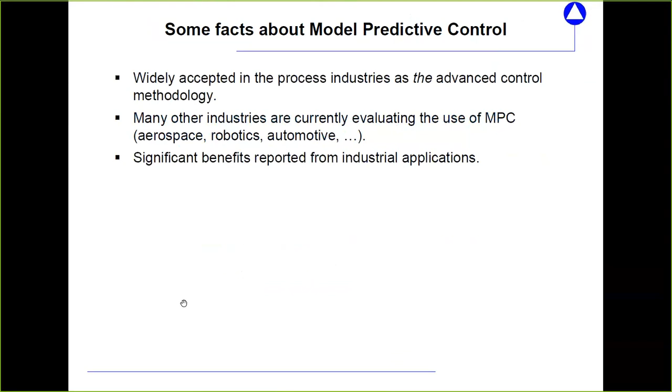Let me give you one example I've taken from the literature. It's an ammonia plant, ammonia production. These plants are really huge, and we're talking about a lot of money. This is an ammonia plant in China. There's a paper I'm citing by Poe and Musif, and in this paper they report about the performance of an MPC controller.

Here you see the time axis running along, and two control variables showing performance in the first couple of minutes—probably these are even hours, 15-minute snapshots. Here a traditional controller is applied, most likely a PI controller, but I do not know. As you can see, the performance shows fluctuations in the system. At this time point, the controller switched to an MPC controller, and from then on those fluctuations are much less. So we would say the MPC controller is really much better, and indeed it is. But with this example, I want to show you a little bit of things you can do with MPC that go in the direction of future directions.

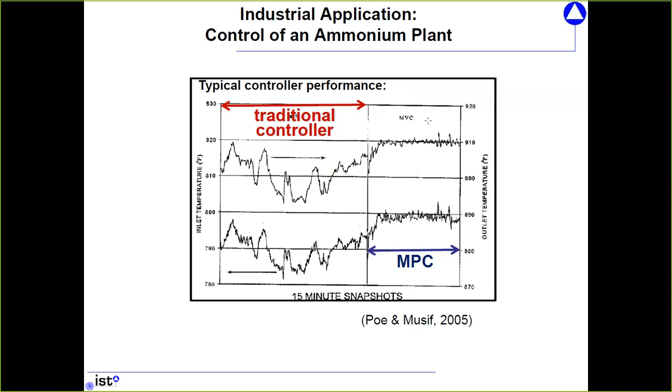Of course, less fluctuations due to disturbances and measurement noise is a good thing. But in this plant, you want to produce ammonium, which means you want those temperature curves as high as possible, but not beyond a certain bound, because beyond that bound the plant goes unstable, explodes, whatever—I'm not an expert in that, but you don't want to go over it. Now, with those fluctuations, to stay away from this critical bound, you have to choose a set point that is fairly low, because your disturbances kick you up and down. If you have less fluctuations, you can move your set point higher because you're still sure you're not hitting this bound.

In this paper, they report a reduced energy consumption by 1.8% and increased productivity by 0.7%. That doesn't sound like much, but I'm sure this is millions of yen and probably also millions of dollars and euros every year. The biggest part of that is not due to better disturbance rejection, but to being able to move the set point to a place where it's better suited. Keep that in mind, because I will come back to it later.

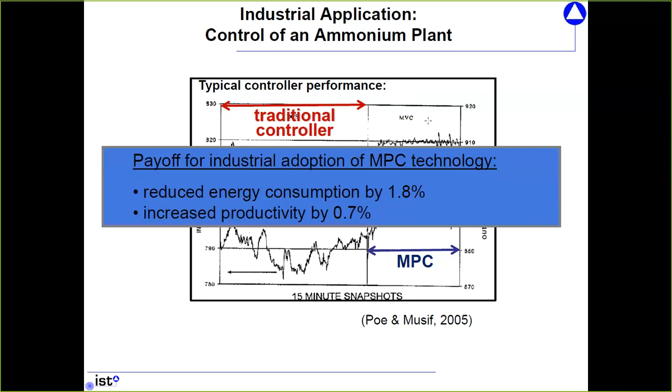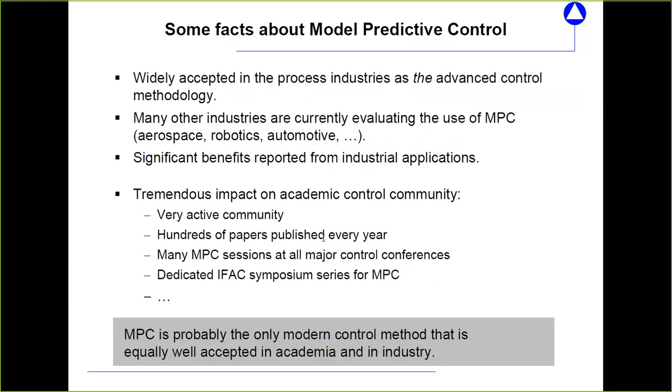So in industry, MPC is very much accepted, but also in academia there is lots of activity going on—it's a very active community. There are hundreds of papers published every year, I would say thousands even, too large a number to read. At all conferences there are many sessions. There's even a dedicated IFAC symposium for nonlinear model predictive control, taking place later this year and every 3 years. It's maybe even fair to say MPC is one of the very few control methodologies really accepted both by academia and by industry—a very interesting methodology.

Now, what is it? I hope I got your attention, and you're saying, oh yeah, we want to know what MPC is. So what does MPC solve? MPC solves an optimization, an optimal control problem, in the sense that we have a plant described here by an ODE, but that can be absolutely generalized to differential algebraic systems, linear systems, even PDEs, to systems with output.

So you see this more as we have a model of a system, and we want to find for that model a stabilizing controller. The first goal is we want to stabilize our system, but we also want to achieve a certain performance.

This performance is given by an objective functional that we want to minimize: an integral objective functional from the current time to infinity over a so-called stage cost that we call f, that depends on our states and on the inputs of the system.

Note, for all those who know MPC, I've written infinity here. So we are interested, when we have an ammonia plant or whatever you want, from the day we switch the controller on to whenever this plant is dismantled, to have an optimized performance. Not over some finite horizon, but really the infinite horizon is what we are interested in.

And now what are we also interested in? We have to satisfy constraints on our inputs, so that the inputs cannot be arbitrary, and we can also have constraints on the states or a mixture of both, such that, like for example in this ammonia plant, we don't want to go above a certain temperature or something like that.

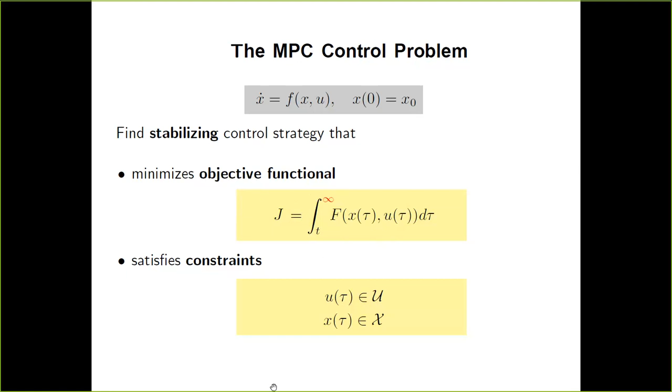This can be written down in the form of this description here. So what we are talking about is really an extremely general problem that we want to solve. A very general class of nonlinear systems that we can deal with, a very general nonlinear objective functional that we can deal with, plus we can have very general, almost arbitrary nonlinear constraints. So this is a very broad problem, but it's an optimal control problem.

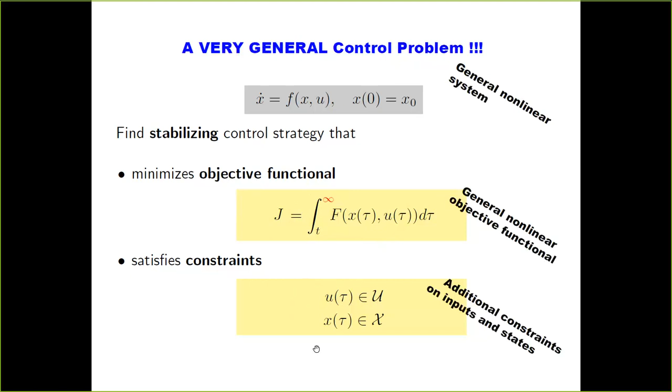Now, how can we solve this optimal control problem? Well, there are essentially two possibilities for that, and these will both not be MPC that I will show you. I want to show you a little later what then MPC does about that.

So one possibility is really that we try to find an optimal feedback controller, a u equals k of x, in the form, in the case of state feedback. So we want to have a map really that maps every point in our state space to an input function, and such that the closed loop trajectories are really satisfying optimality conditions. This is the classical optimal control problem, and this is a wonderful theory that leads to many different solutions.

Hamilton-Jacobi, Pontryagin's maximum principle, a lot of important things that are really associated with that. And it's a wonderful methodology, beautiful. You have a feedback, of course, because we design a feedback. It's suited for uncertainties, it's good for disturbances, it's good for unstable systems, but it has one significant drawback.

If you have some system that is beyond the most trivial cases, then you will not be able to compute such a feedback. It's very difficult, especially in the constrained case. So wonderful theory, by the way, a very old theory. We are talking about almost 70 years now for that theory, but you will not be able to find it.

Now, what's the other approach? Well, if we are operating a system, then we don't really have to compute offline such a map that holds for all our states in the region where we are interested in. We know where we are.

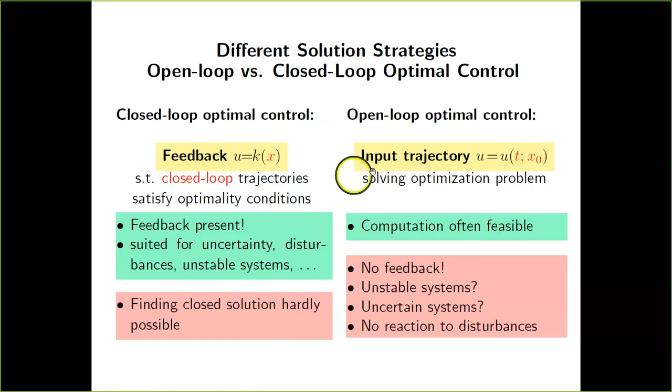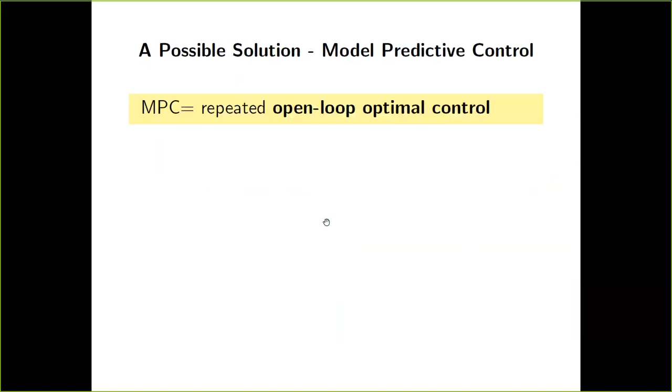And this is done in that you are not solving this open loop optimal control problem only once. You take a measurement, compute a trajectory, and then you just implement it and go away, but you do that in a repeated fashion. So you repeatedly online solve this open loop optimal control problem.

So you're solving this minimization problem over an infinite horizon. We are computing a U for the total future, for everything in the future, but then we are not implementing the whole U trajectory, but only a piece of this input trajectory, from time t to t plus delta, and then we are re-evaluating.

Then we are looking what the system does. There is a disturbance, there was model-plant mismatch, some measurement noise. We are somewhere else than we expected, and we are resolving that problem again at that time point. So we are repeatedly solving this same problem and are adjusting to where we are, this way introducing a feedback into our structure. Now, here I look at an infinite horizon problem.

An infinite horizon is pretty long. So even if you have a strong computer, a big computer, going to infinity is very long. That's why in MPC we are choosing a finite prediction horizon. And that's the only reason why we are choosing a finite horizon, because this gives us a much simpler way of how to compute things. Potentially we want to have a very short horizon in which we look at our problem, in order to have really a small problem.

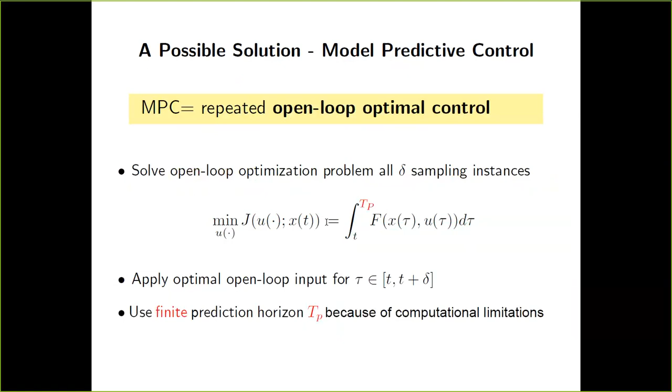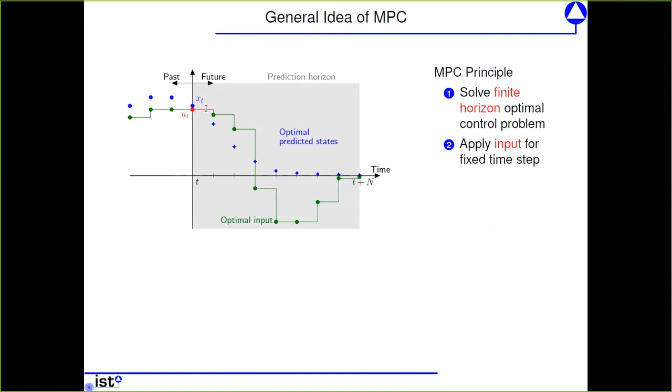Then over our horizon, so over a certain length into the future, here called n - in the former slide I called it t in the continuous time - we are computing an optimal input trajectory, but then we are not implementing the whole green trajectory up to the very end, but we are only implementing, say, the first step of our system. And then when the real time has progressed by this one step, we are re-evaluating our system.

We shift the horizon. That's why it's called the receding horizon, moving horizon control method. We shift the horizon, we keep it the same length. And now we are redoing our computations, again, over the whole horizon, implementing only the first piece, and so on.

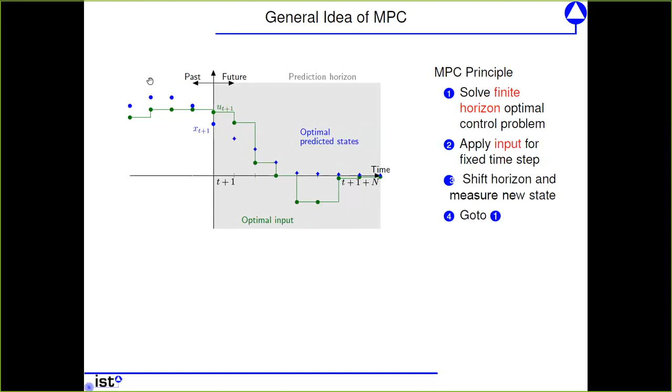So this is really like in the case of playing chess. You have a certain situation, that's our state on the chessboard, and then you are looking ahead, you're planning ahead in the future how you want to play. If I look at the phases here, I would say 20, 30 steps into the future.

You are calculating what you think is your trajectory, but you're only revealing the first step - in my case, maybe 2 or 3, right? So you're only revealing the very first step. Then you do that step, you apply that input, and then you look at what the disturbance is doing. That's the one on the other side of the table in that case.

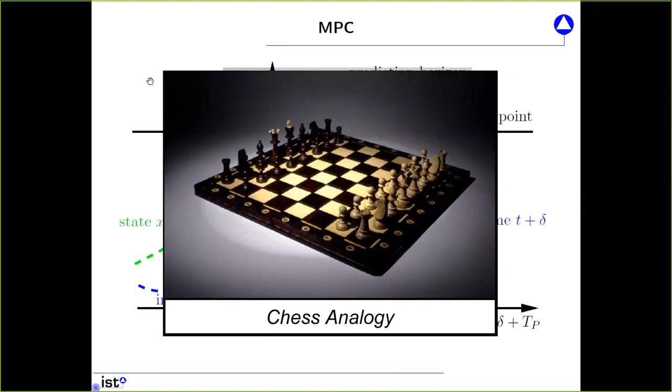And this person makes a move, a disturbance, and then you are re-evaluating again. You're not just following your old trajectory, but you're saying again, my 30 steps into the future, I'm doing that again, and have a new strategy. I apply again the first one, and so on. So MPC is really reacting to the disturbance, incorporating a feedback into an open loop trajectory generation process.

So what does the problem look like that we have to solve? The problem we have to solve at every point in time, in discrete time, is the following: we have to minimize over our U our cost functional with the stage cost small l over the horizon n, subject to the input and the states being related through our system dynamics.

The starting point is the measurement, and what we have to do is satisfy constraints, so x and u have to belong to a certain set. This notation with the bar is typical in MPC, indicating evaluation at time point x of t. The real time is t, and from then on, in a fictitious time, you're computing what happens in the future. These are the u's over this horizon, evaluated at this real time t.

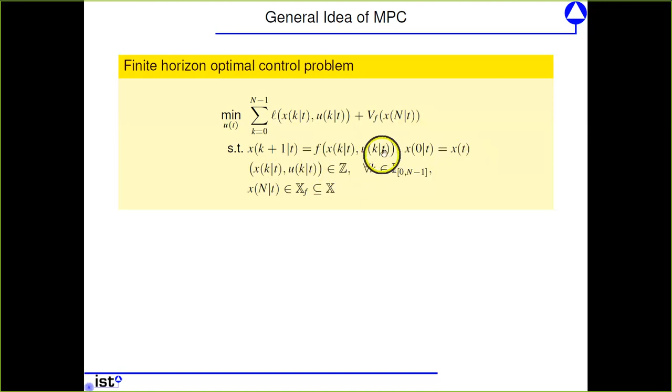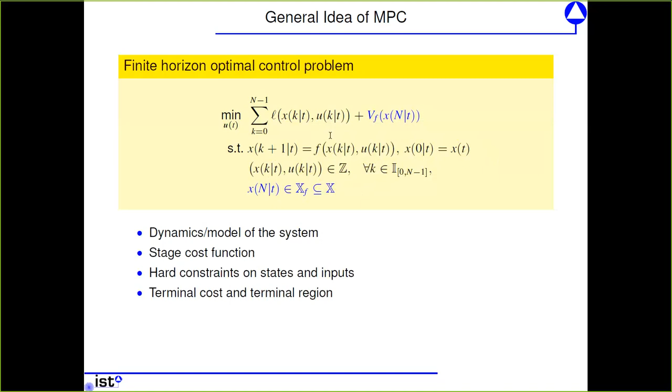What you also see in this figure are two additional terms. One is a terminal penalty term, and one is a terminal constraint at the bottom. Those will play a role later on. They are not chosen arbitrarily, as if you wanted a special weight on your last step, but this will be part of our controller computation, computed offline in order to achieve certain tasks.

This idea is really an old MPC idea, and it's absolutely unclear where it came up. The first citation I know of, which I admit I couldn't read because it's in Russian, is by Propoy from the 60s. Propoy is still alive, and we met him a couple of years back at a conference and asked, 'you were the one who invented MPC?' He said, 'no, this is really not an invention. Everybody knew that at the time, and it was kind of obvious.'

So no one knows who invented MPC, but there are early textbooks, like Lee and Marcus' book from '67, where this methodology is described. You can read through that yourself. But that book also says it's a nice idea, but in reality you can't do it because you'll never have a fast enough computer to do those computations. Well, so much for developments in computer science—now we have the computers.

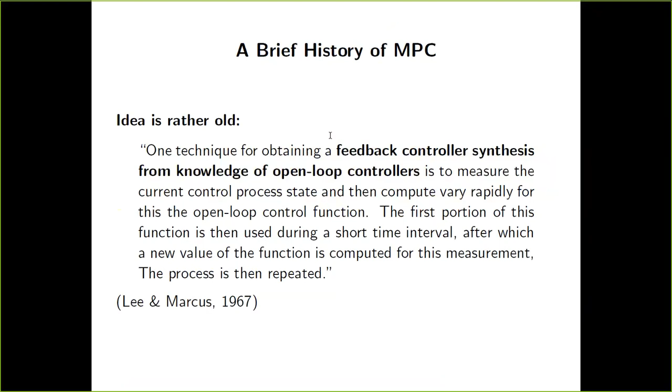This is very important, because the first people who really pushed this technology forward were in industry, essentially two groups: Charlie Cutler and his group at Shell Oil, who developed software called DMC, and Jacques Richalet in France with Adersa, who had a product called IDCOM. In the early 70s, they applied that to industrial methods. They didn't publish anything about it because they made a lot of money with it, and there was even an attempt to get a patent on the MPC methodology. But this patent could not be granted because of the book by Lee and Marcus, since it was already known beforehand.

The first publications are from '76, '79, as far as I know—I don't want to bet on that, maybe there were earlier ones—but it's clear that academic research came a little later. This was something pushed forward in industry first: yes, we can do it for linear systems, very special setups, using quadratic programs, and it could be done in reality. Only later did academic people at universities ask, okay, is this stabilizing? What can we do with that? So it really came later.

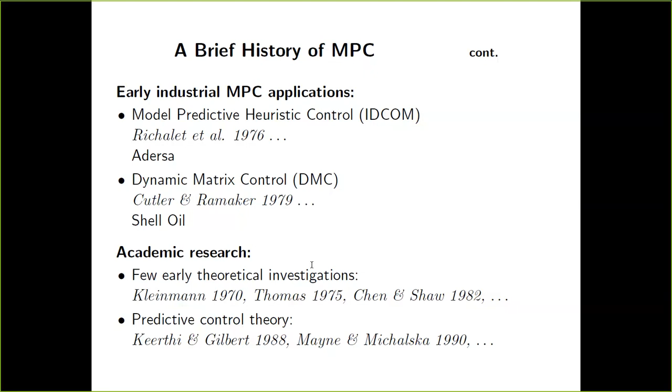I would say the first people who really understood the methodology, at least the nonlinear part, were Keerthi and Gilbert for discrete time, and Mayne and Michalska for continuous time. These were the first publications where the core of the system theoretic problem was really understood—how can you do systems theory for this kind of thinking? I will show you a little bit what the problem is and how you can deal with that.

Essentially, there are two issues in predictive control that you have to deal with. One is the computational issue: at every point in time you have to solve this optimization problem, which is an effort, not trivial, and you can do it in a very stupid way or a highly sophisticated way. There's a whole research community on that, with very sophisticated algorithms and approaches to solve that problem—I'm not going to talk about that at all, I'm also the wrong person to talk about it. What I'd like to discuss, at least a little, is the system theoretic issues.

So what does this method do if we apply this MPC scheme? Are we stabilizing? Is this giving us good performance? How do we deal with rejection of disturbances? How do we have robustness, and so on? This is a systems theoretic problem, and I'm going to discuss it now to give you a flavor of what's going on.

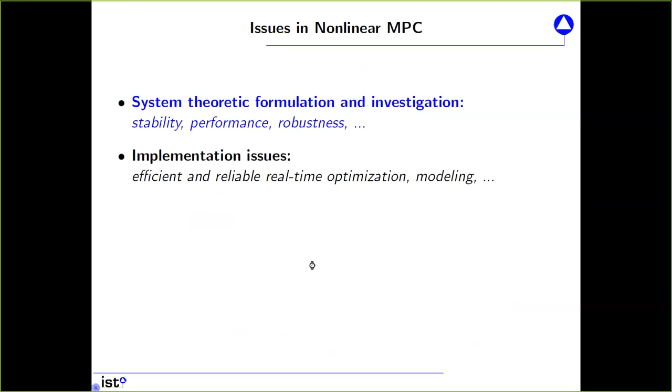The first main question we have to think about is: if we just plain vanilla apply this methodology, take MPC, slap it on a system, take a plant model that is as good as we can, and apply it, is the system stabilizing? The answer is no guarantee. It's not generically stabilizing. Even if you know the system correctly, even if you have no disturbances, no measurement noise, this is not a stabilizing methodology, so you cannot be sure.

People immediately say, before you told us in the 70s they applied it and didn't have a clue how to analyze stability, and obviously it worked, it really worked. So what's the problem? Here's the proof. Here is a first example. I will give you two examples.

One example taken from the literature, Primbs. This is a second order system, and it's immediately clear that it's a cooked system. We acknowledge it's a second order system having one input and state, with a classical quadratic cost functional. Now we are looking at the stability properties for different horizon lengths of the system: 0.3, 0.4, 1.0, and so on.

Down on the left side here you see a state space picture. We want to stabilize to the origin. Here is one exemplary initial condition, and these different curves show the behavior of the real closed loop, not the optimization, at a specific time, to show whether we have stability. If the prediction horizon is 0.2, a short prediction horizon, we go unstable. If you increase it to 0.3, you get stable behavior. Increase it further and you get unstable behavior again. Increase it more, still unstable. Go even further, and you get stable at one point again.

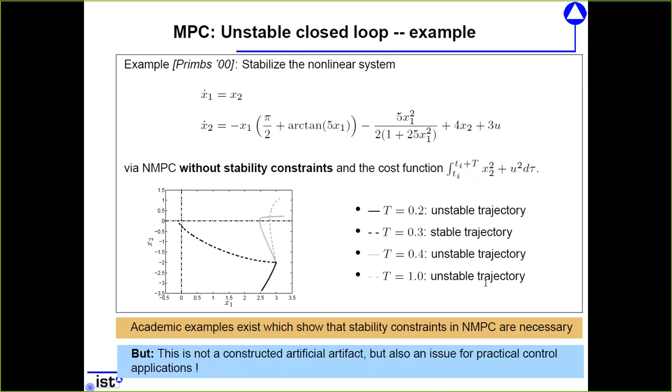Now, this was a cooked example, we agreed. I didn't cook it, other people cooked it, but it was cooked. Can that really happen in reality? Our immediate reaction is reality is not cooked, it's more engineered or more natural, so it won't happen there. But yes, it also does.

Now I show you a second example, and here the audience, many students already know this. This is our 4-tank system that we use in our control courses. I would say the control of the 4-tank system is probably the most boring of the lab experiments we do in our teaching. You have to wait a long time before you see something, and then you don't see much. It's a really slow, boring, and pretty much stable system. To do something bad to that system is a really big problem.

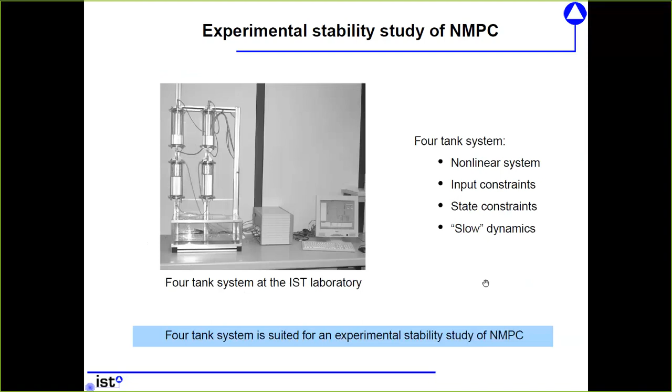Now let's look at this system and do a plain vanilla MPC controller. Again, nothing cooked in this case, just using a cost function that makes sense, a prediction horizon that makes sense, and let's apply the resulting controller to this boring system. Here you see the results: this is the solid line up to 150 seconds roughly, the experiment. The gray line is the simulation, so you can see it better. You see the heights in the 4 tanks for that system, and it's a standard setup.

We're using a prediction horizon of 1 minute, which is pretty reasonable for this 4-tank system—not a short prediction horizon, but a reasonable one. And what you can see if you apply plain vanilla MPC is that after 150 seconds, the 4th tank gets to 28 centimeters, which is the height of the tanks.

If you go beyond that, then you have a mess in the lab. That's why this experiment is stopped at that point in time, because then the tank would overflow. The simulation you can carry on, so it's truly an unstable behavior of that system.

So standard plain vanilla MPC without any tricks, with a horizon length that makes a lot of sense, is not stabilizing this slow, boring 4th order system that we are having here. And of course, that is a little bit shocking, right?

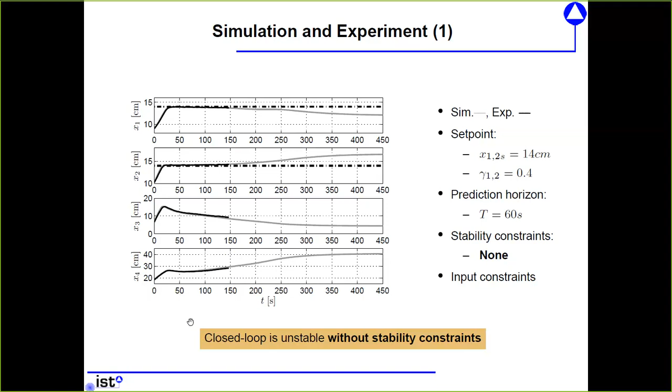So would you now go to this ammonia plant and apply your methods and say, okay, well, if we don't want to go beyond a certain temperature, otherwise it explodes? Probably not. So here you can see that this is really not an artifact.

Here you can see a couple more curves, now all in simulation. If you increase the horizon length further up to 90, it's still unstable. Only if you go beyond 135 does it get stable. 135, a little more than 2 minutes.

This is normally not how long students would want to wait for the control to see the control behavior in their control lab. I will come back to that in a second and show you that it is indeed possible to have an MPC controller with a short prediction horizon of only 60 seconds that is stabilizing that system, but not just applying plain vanilla MPC.

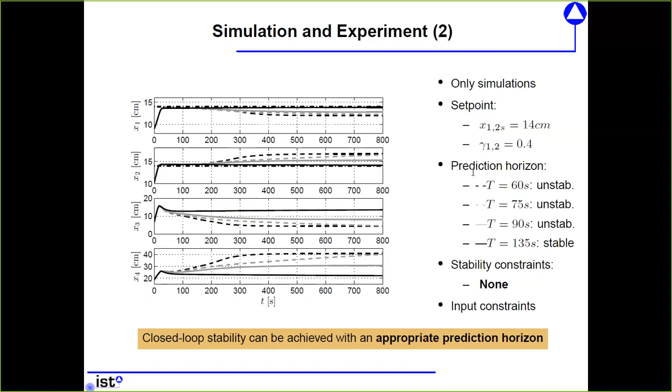So, well, we could now say, all right, so we get a control behavior with an MPC controller. Let's just analyze the controller as we normally do. We compute it, right? And then we analyze the controller, and if it's stable, all right, we won. If it's not stable, we do something, like increase the prediction horizon.

But how would you want to do the analysis of the stability of this control system? We are not getting a controller, right? What we are doing is at each step computing a trajectory. From that trajectory, we take the first piece. The rest we are throwing away. And that's it. We have no u equals k of x that we could plug into our system.

We can't linearize it, look at the poles, or do Lyapunov theory in order to get stability. We do not have a controller. So analyzing the stability of the closed loop is just not possible, period.

Second thing is, of course, we are smart. We are predicting into the future, right? So we see where we are going. So let's just look if all my trajectories are heading to the origin. What can go wrong, right? All of them, I do a simulation, an optimization in the future, and it almost goes to the origin in my finite horizon. What could go wrong if at each point I'm going in the right direction?

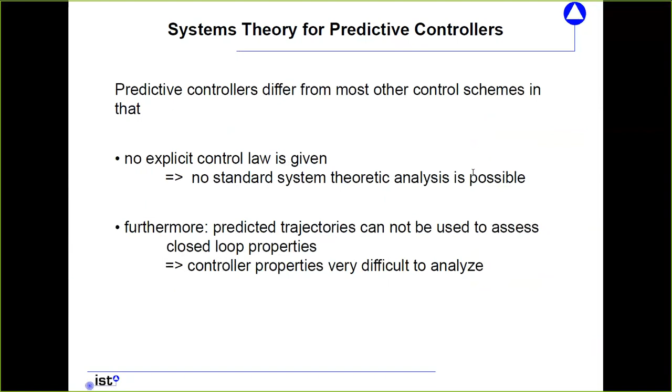Again, not true. And I want to show you that with a little cartoon again. So even in the case where we have no model plant mismatch, so we know our system perfectly, we have no disturbances, nothing else - really the best ideal case - then the predicted open loop trajectories, the result of our computation, will not be what we see in the closed loop.

Now, what's the reason for that? Here is again our state space. The origin is where we want to go to, some initial condition of our system. Let's first look at the infinite horizon problem, the one we are actually interested in, right?

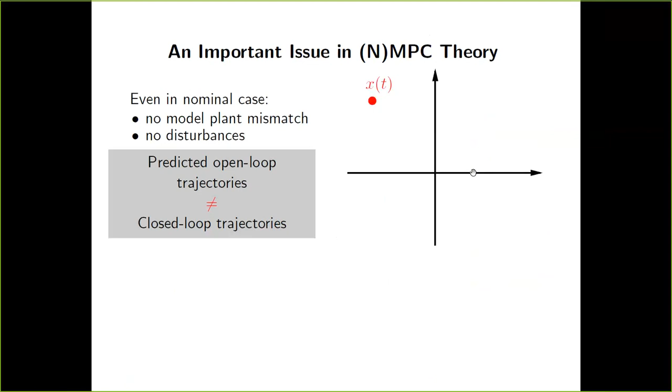If we could solve the infinite horizon problem, then this is our optimal trajectory that would go to the origin, this green curve here. And if we now implement the first piece of that trajectory and redo our computations at that point in time, then the result of that computation would be the same trajectory again. End pieces of optimal trajectories are optimal - Bellman's principle of optimality.

So in that case, the predicted open loop trajectories do coincide with the real closed loop trajectories that we are having.

Now let's look at the finite horizon. This is the one we are solving here in MPC. So we only look into the future over a finite horizon. We do that because we don't want to compute so much. We have a fast system, and we cannot really look for a very long horizon. Now we do our optimal computation.

This is this green curve here. And now I'm implementing the first piece. And because I have no disturbances, no model plant mismatch, I'm, of course, also following that trajectory, the same as before. But now, if I'm at this new point and I'm re-evaluating my trajectory, I have shifted my horizon.

I'm looking further in the future and seeing something I haven't seen before. Maybe there's been a disturbance—not a disturbance, a constraint that I cannot go through. That could well be, right? I didn't see it before, so I have to re-evaluate, or there's some behavior of my cost function. The solution will not be the same because I look over a different horizon of my system. Then I implement again the first piece, look again at the solution, and that will differ again.

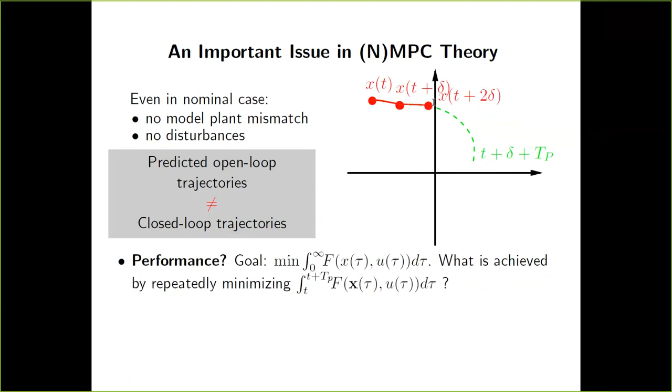So my predicted trajectories are not the ones that I'm following. The ones that I predicted at first are down here, but I'm now staying up there. Now, what does that mean?

Implicitly in MPC, we were really hoping to solve this problem down here, the infinite horizon problem, over a certain stage cost. This was our hope that we started out with optimizing. And we do that by minimizing repeatedly the same objective functional, just with a finite horizon, but with the same stage cost function, hoping that if we do that, this is a solution to our original problem.

But now we already see the trajectories are not the same, right? So we are not following the same trajectory. So repeatedly solving that problem down here does not give us a solution to the problem above.

So from a first result—we are talking about stability at the moment, I know—but the first insight from this, that the predicted trajectories are not the same as the true trajectories, is that we are not solving the problem we want to solve. We are solving something else. So we have a problem here.

Now, if you play this game further, now that you're not really getting a solution from this cartoon, you can see that you're really not guaranteed to be stable. In that case, you would just have a limit cycle, but it's easily possible to cook up examples where you really go to instability, even so that every trajectory points in the right direction.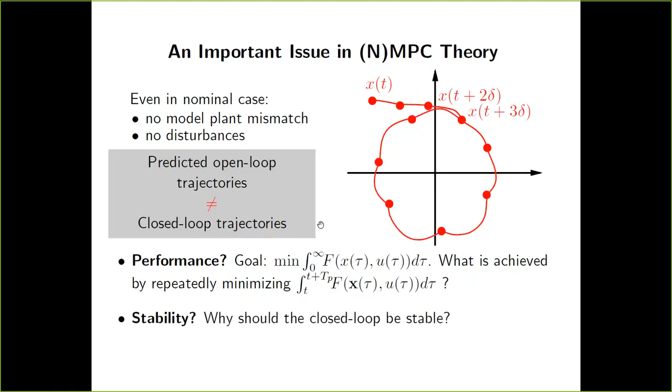So we have a true problem. We cannot guarantee with this methodology anything—not that we solve the problem at hand that we want to solve, nor that we have stability.

So the question is really how to achieve stability. And I just want to let that sit for a second—it's not a simple problem, right? It really took academia a long time to come up with a solution. It's not a simple problem to solve, because we have no means of even analyzing it.

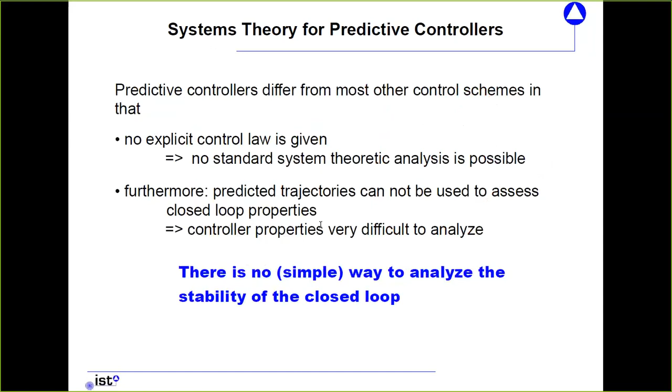But of course it can be done. One of the things that we just saw already, and that is very well known in the MPC field since its very beginning, is that if we have a large horizon—so if we go almost to infinity, so if we are really close to the original—everything is fine. So with a very large horizon, things are not problematic. We get good performance. The trajectories still differ, but they only differ by a little bit.

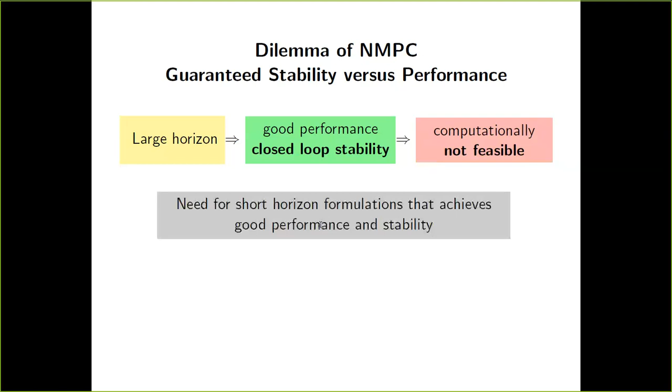But that is, of course, not what we want to do. We don't want to just have a very, very large horizon, because we want to do our computations fairly fast. So we want a formulation, something else that gives us a solution to that problem, so that we can guarantee stability, hopefully also address performance, despite the fact that we are giving a short prediction horizon.

So for the stabilization problem, there are essentially two solutions, two possible approaches. One is the approach that's called guaranteed stability. And the idea behind that is: we already saw that if we repeatedly solve this finite horizon optimization problem, we are not getting the solution to the real problem.

Let's alter the problem. Let's take a different stage cost function. Let's look at a different problem and choose it such that we get an approximation to the true system. That is called an approach with guaranteed stability in MPC. What you are essentially doing is introducing terminal constraints and terminal penalty terms that I showed you before—these are called the stabilizing ingredients, or the stability constraints of your system.

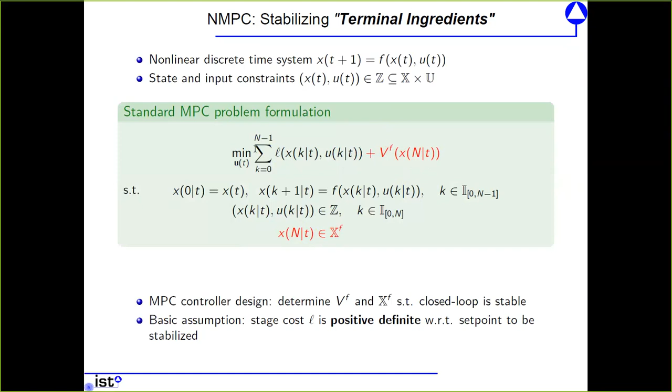So what you are doing is designing, offline beforehand, appropriate terminal penalty terms and appropriate terminal constraints, such that if you solve this problem with those additional two items, this becomes an approximation to your old problem, for which you can give a guarantee. There are many approaches for how you can do that, and this is a fairly old technique.

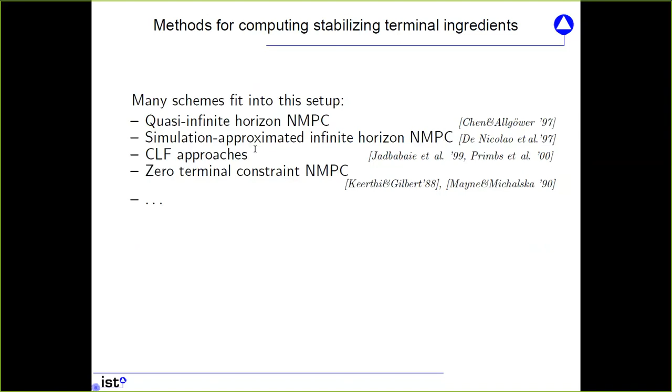This was the 90s of the last century when people were working on this, but it's still a problem actively researched about. Here is a result from quasi-infinite horizon that we have done, just to give you a feeling for how things work. This E and this epsilon here, it's a continuous time case now, so I'm switching back and forth, to demonstrate that everything can be done in discrete and continuous time. I did that by purpose. You can have the following result there.

If you compute those terms, E and epsilon, in a certain way, such that this condition here is satisfied, what you want is that within this epsilon region around our origin, you can find an input such that this control Lyapunov function here is satisfied, with this E term and the stage cost up there. You have to compute it so that this is satisfied, and those into nonlinear control theory immediately see where this is going. But I'm not going into that here at all.

But if you have a second thing, namely that the optimization is feasible at the initial time, then you can guarantee that your feasibility, you find a solution to your optimization problem, stays. That's called recursive feasibility, and you indeed get asymptotic stability, and that all points for which your optimization problem is feasible at the initial time is a subset of the region of attraction of your problem. So you are really getting stability.

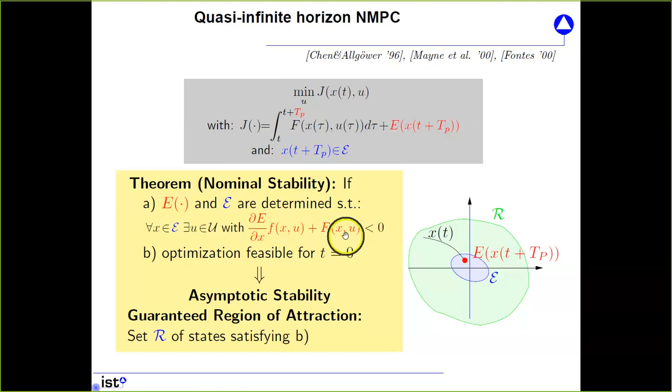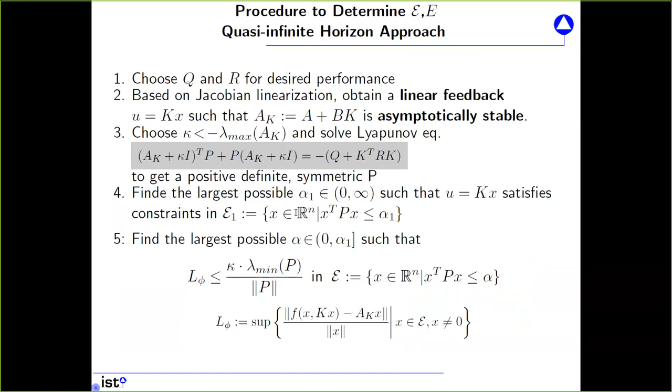The beauty is that this E and epsilon that now looks fairly complex, you can compute it. I'm not going through that at all, but you can first do that, second do that, fifth do that. These are all fairly simple steps compared to the very general problem we are looking at. And you can compute those ingredients offline beforehand. Then with those ingredients, you really get a stable closed loop.

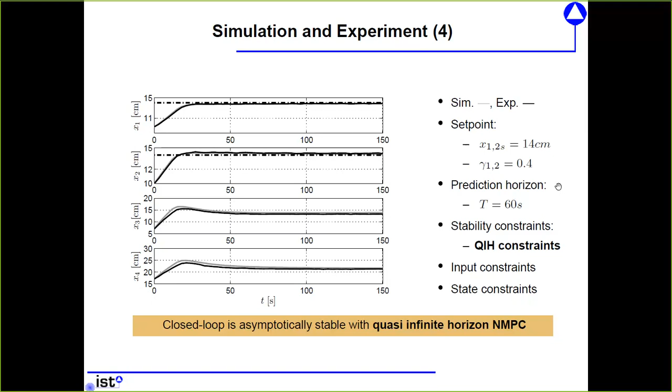Let's recall our lab experiment here. Remember, with t equals 60 seconds, 1 minute, the system was unstable. Now we included those stability constraints, the quasi-infinite horizon constraints, the E and the epsilon, in the same problem, changed nothing else of our system. And as you can see, everything is going fine. We have a stable closed loop, as we have proved before. So it's not really surprising, but this is a stable closed loop for our system.

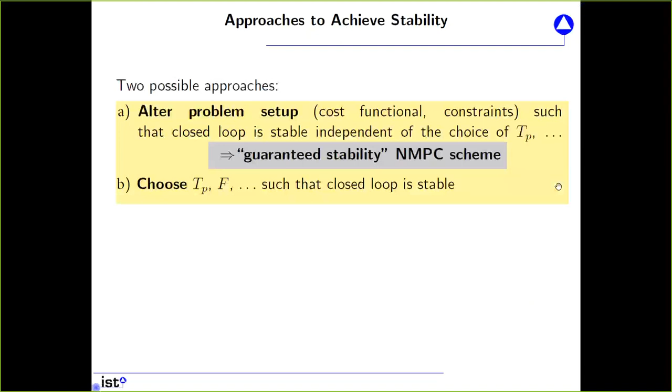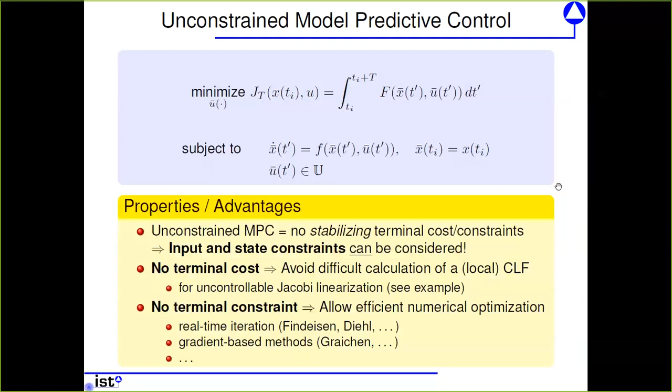Okay, that is one approach. The second, looking at the time I'm skipping, alternative is you try to find the minimum prediction length you have to use, going close to infinity, in order to come to a solution. This is a much younger approach, called unconstrained model predictive control. It's actually the worst chosen name you can imagine, because this is a problem where you can have constraints on your inputs and so on, but you don't have stability constraints in your system. You don't need the E and the epsilon. You're just calculating a prediction horizon length that guarantees you to be stable. This can be done, and it's a very interesting methodology where you can come up with a fairly conservative result, but these are much younger methods here.

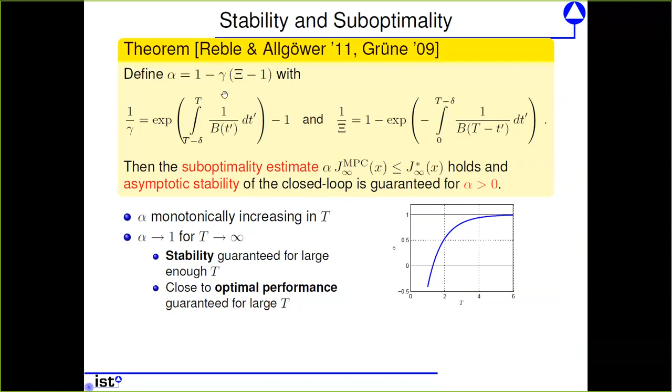So we are now talking about really fairly recent results, how to do these kind of things. Both approaches have advantages and drawbacks. Let me go through that a little quicker. I promised at the beginning that I want to tell you also a little bit where we are moving to. Now, where do we apply our controllers?

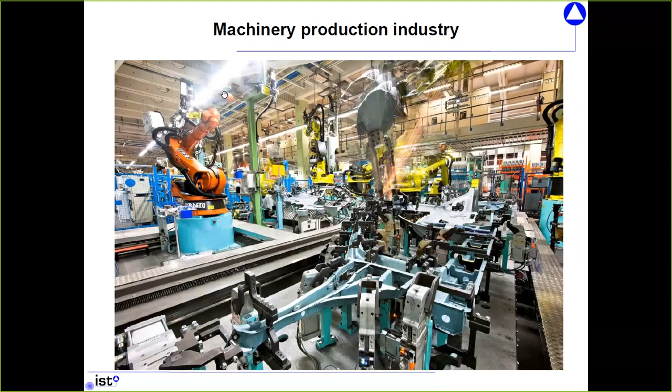At least here in the Stuttgart area, where we have a lot of machine production industry and car production industry running around, we are dealing at the moment a lot with what's called Industry 4.0. Industry 4.0 is the idea that you move away from sequential production, where one thing after the other is done, to a more flexible production where your production stations can do a lot more things. For each product itself, it's determined online how that is assembled.

So maybe this makes no sense here, but you first put the steering wheel in before you put the wheels on the car, or something like that. You leave that open depending on which station is available, who can do what, and whether the person ordering a car wants a steering wheel.

In the future, that may just be an optional item, right? And so we really have a much more complex system. So we have stations that are not pre-calculated, where you have a controller that you put in a lot of effort before, and always they perform exactly the same thing, operate at the same steady state.

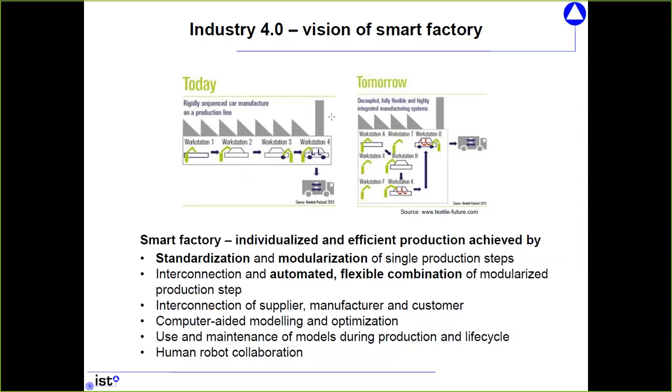I'm using that technology now. But what they are doing different things, and at different points, whether you order a Mercedes S-Class or a Mercedes A-Class is a different kind of thing, but the same production station can deal with both cars. So essentially we have this whole mix of production things, and they talk to each other, and each time they do something different. So from a control point of view, what we have is a dynamic network of systems in which we are producing something.

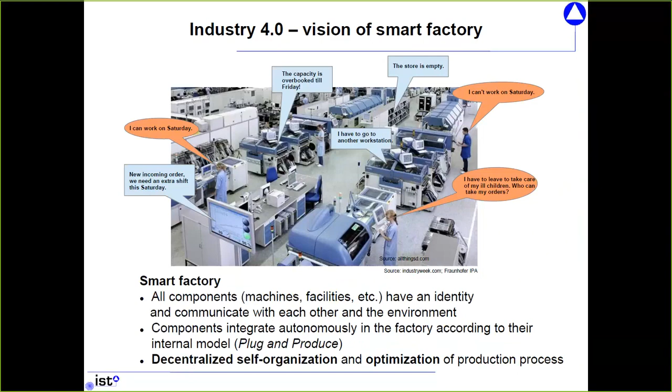And each of those nodes is controlled, but now they are not always doing the same thing. So if you once pre-computed something at a steady state, then if you have another thing to do, this steady state pre-computation, this E and the epsilon, they are the wrong ones for your new task. And also if you say, okay, it doesn't matter, I do it anyway, then you will get to a very suboptimal result in your system.

So this can be a little bit generalized. So far we are now looking again only to one plant that we want to control. So far, we want to stabilize it at a predetermined steady state. This was our goal. But here in this Industry 4.0 context, we want to achieve something as optimal as it can, and that's not necessarily going to the pre-computed steady state that you have.

And so what we want to do is get away from having a set point before, having a cost function that is positive definite around that set point, which is a requirement. I forgot to mention that in order to really prove that it's a stabilizing MPC scheme. So if you go away from the steady state, your cost increases.

But we don't want to have that. Maybe we want to just put in euros for our individual costs. Do something to earn as much money as you can, and then the best performance is certainly not at a set point, but infinity sounds pretty good in terms of euros. So this is called economic MPC.

So you're not giving a set point. You are only saying I have a system. I have an objective functional, minimizing energy, maximizing euros, dollars, yuan, or whatever you want. And the cost function is now, of course, not a positive definite function.

And now the question is, of course, what properties does a system like that have? Of course, as I try to motivate, this makes a lot of sense. If you have a chemical production facility and you have a disturbance that you have more initial reactant in your reactor, a classical controller says, catastrophe, we have to get rid of it. An MPC controller would say, wonderful, let's produce more, sell more, and we have more dollars. Refrigeration system, if the outside gets colder, it's a good disturbance, right?

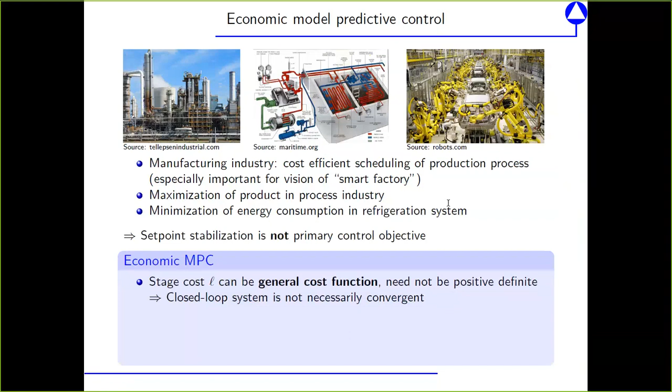So we like cold. And in the production system, Industry 4.0, we of course have that naturally through the different properties that we are having. Now, so far the stage cost was positive definite. Now, if it's not positive definite, if we just look at this kind of performance, what is happening in our system? What kind of behavior are we getting? And especially, where are we converging to?

What's going on? So with the set point, of course, we go to the set point. But here we have no set point. And it's well known, at least in the process industry, that indeed the optimal operation of systems doesn't have to be a set point. If you compute the optimum, it could be a trajectory. So if you just want an optimal operation of this reactor, then this is the optimal result. And this would also be the output of your MPC controller that you are getting.

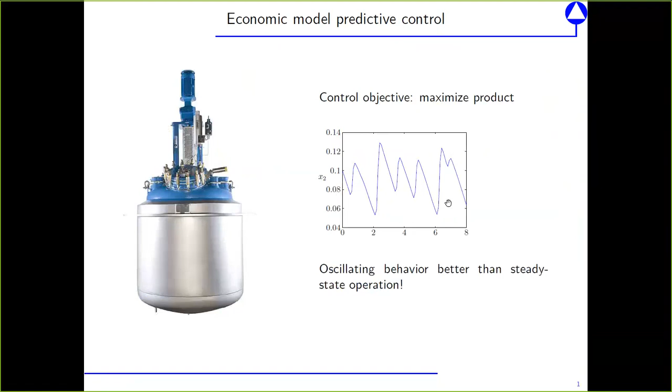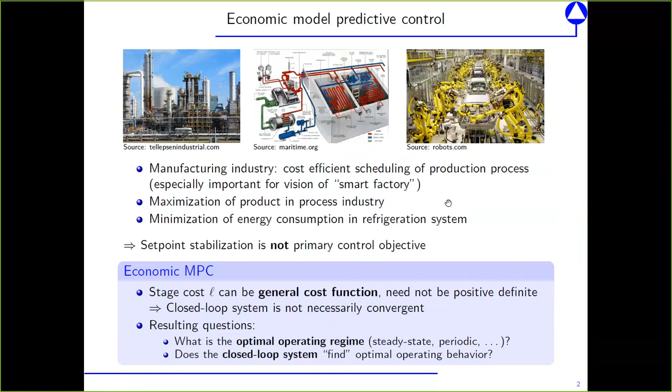If you have a system, let's say our 4-tank in the basement, and this is the optimal way how to operate it, you would like to know beforehand so that you stay alert. The second question is, if you have such a kind of behavior, are you going to that? Or if you have an optimal new set point that the system finds itself, are you approaching that set point? Is that kind of guaranteed? That is now the new MPC theory that we are talking about.

I will go again over that much more faster, so you can really analyze the MPC controller in that respect. As we have done before with stability, we now ask the question: what is the optimal operating regime? Will we have these fluctuations, or will it be an optimal steady state that we don't know beforehand? But will it go to that optimal steady state?

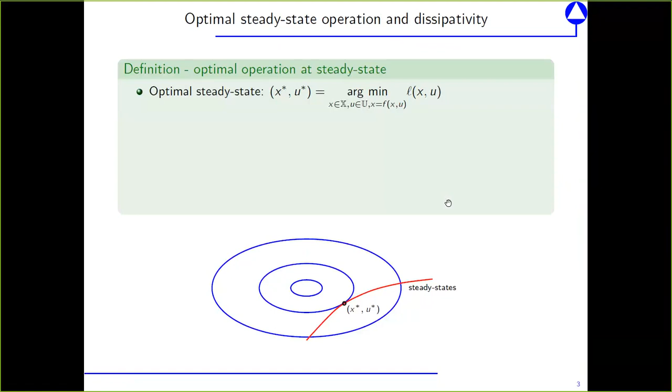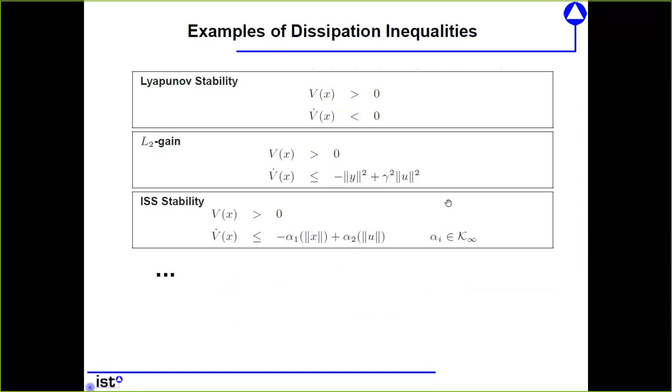The interesting thing is that this analysis problem can be solved with tools that we know, namely dissipation inequalities. For reasons of time, I'm not going into that, but everybody knows dissipation inequalities. A Lyapunov function is a dissipation inequality. You can check L2 gain, ISS, stability. You can do almost everything using dissipation inequalities by having different supply rates for which you have to find a storage function.

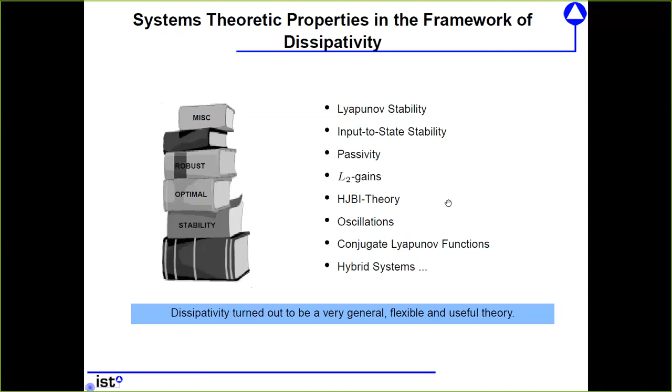Now asking the question whether our optimal behavior converges to a steady state or set point, or whether we have a fluctuation, we can answer this by looking for a solution to a particular dissipativity inequality with the supply rate that is just the stage cost function of our system minus the stage cost evaluated at the optimal steady state, for which we don't know whether it's the optimal operation - a dynamic one could be even better. The result is indeed a necessary and sufficient result. This is very interesting - Lyapunov, as we all know, is only sufficient.

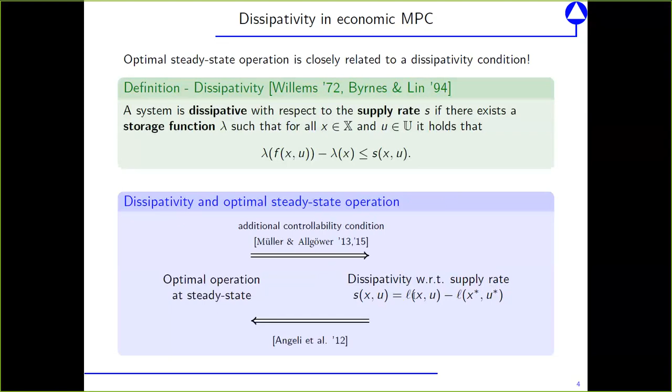This is a necessary and sufficient result for our system. So if this dissipation inequality is satisfied, if we can find a storage function, then we know the optimal operation will be a steady state, and you can compute that beforehand. Now you ask the question: are we converging to this behavior? Will our MPC controller go there? If you're demanding strict dissipativity, then you can prove that you are indeed converging to that system.

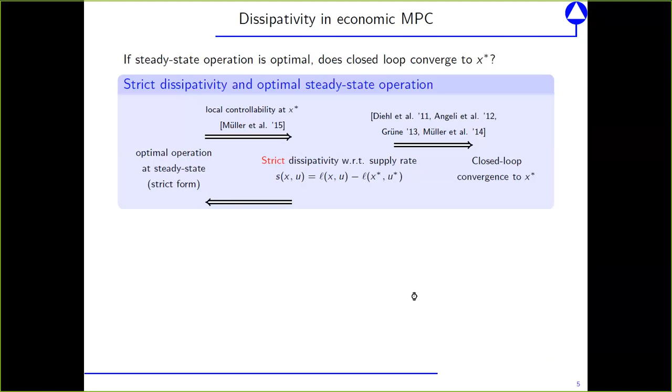You can also answer other questions, namely whether you want to go to a periodic behavior - then you just have to choose a different supply rate, a p-step related supply rate. I don't want to explain, but everything holds true there too. So the good news is, even though this is a completely different control problem from everything we have so far, still the tools and methods from the control community that we have can still be applied in that framework.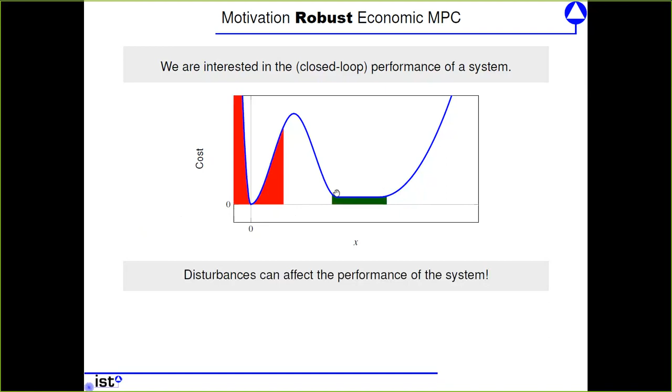But now if we have disturbances, then we are not operating at that point - we are going back and forth. At some size of the disturbance, it may be much more economical to go to a different place for operation, and this is something we also hope an economic MPC framework takes care of automatically - the controller would go to the right one. And this can also be done. The larger the disturbances are, the better that gets. You can do many different things, and you can have many different assumptions on the disturbances that you have.

I want to just flash one picture to mention one approach, namely tube MPC. Tube MPC is a methodology I'm not going to talk about at all, but it allows us to talk about robustness in MPC problems - not only for economic MPC, but also for the classical stabilizing MPC. So tube MPC is one of the thinkings, and if you're interested in finding more out about that, that's the word to Google or to find papers on.

What we of course have in the framework of Industry 4.0, we not only have one plant, but we have many, many plants that are interconnected. So we have a network of dynamical systems.

And now the question is, can we have individual economic MPC controllers for each of our plants, then slap everything together over our network and have a distributed MPC solution? So the controllers talk to each other, yes, but it's not one big optimization problem that we are solving. We are only exchanging certain information.

And now the interesting result here is really, yes, it can all be applied. We can have a setup here. It's not trivial and too much detail for a general talk the way I've given, but you can really find a setup such that even in a distributed environment, you are going to the optimal behavior of the overall system that you have. And even this thinking with dissipation inequalities, what kind of behavior will we have at this optimum for the whole network of systems, is still governed by dissipation inequalities.

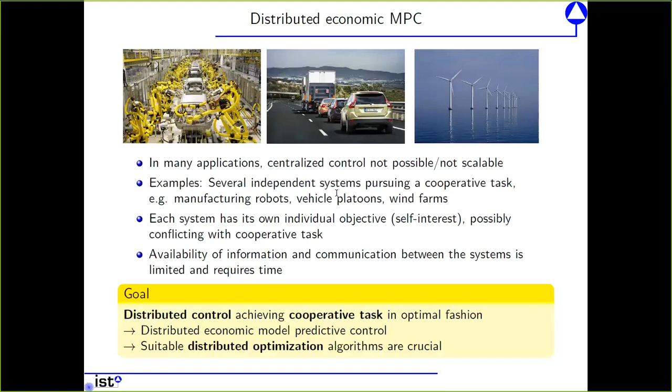As I'm running out of time, you see I had a little more ideas. I'm jumping to the end, and what I want to say is, okay, the world around is changing. The control problems are changing. It's getting more and more competitive, more and more flexible, more and more online computational possibilities.

So what we are having is this network of systems that somehow interact. And yes, this introduces new challenges, namely no pre-computed set points anymore. But we have to deal with somehow an optimization of something that can lead to more general behaviors.

And secondly, we can say, yes, MPC provides us very naturally with this kind of methodology. And not only conceptually, that you can set up these optimization problems and just say, let's see whether it finds our solution, but that we can also find an MPC systems theory and MPC control theory such that we can really give guarantees that this behavior is the one that we are really expecting.

And this really brings me to my closing slide here. So I think in this old field of MPC, that is really a very successful field for classical control, there is lots of things going on even at the moment. Lots of things that are not just filling the gaps and doing the epsilons and deltas to find the last little things that can be done, but there are exciting new developments in this area, exciting new developments that really also make it necessary to have active research in that field. And I think that is really one of the bonuses of MPC, and of course in an environment where the industrial relevance is really high.

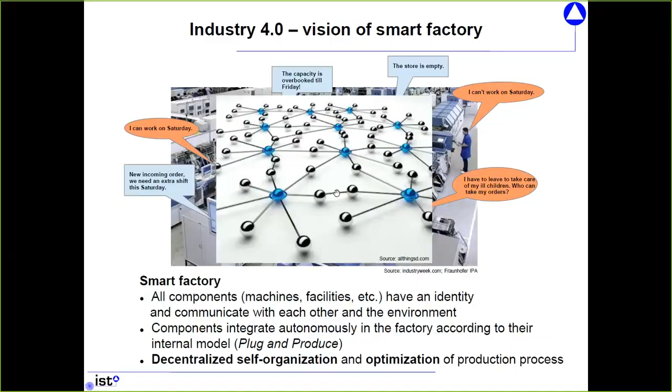So let me acknowledge all the results that I have shown were not my own. They were by Matthias Müller, assistant professor here in the Institute, Florian Bayer, former PhD student, and Philipp Köhler, a current PhD student. And Philipp, I have to really thank you very much. This would not be possible because he's the one who is running this whole show here, at least from the Stuttgart side. Tansel is doing that from the Florida side. All the technology that you hopefully could hear me and see, especially the slides, this is due to Philipp. So thank you very much.

And with that, I would like to end my presentation and give the general audience, wherever you are, the possibility to ask questions, and of course also the local audience. Thanks very much. Thanks a lot, Frank.

So Tansel, I think now it's your turn again, right? So we can keep the camera on you. Let's see how we can do that. I will keep the ball on you just in case for some questions you may want to go through your slides. So we still need Philip. So all right, now we can ask questions. We can do a couple of ways. You can

Unmute yourselves, or if you like, Frank, we can start questions from your side. Okay, shall we do that? Start with questions from the audience here. Anybody here having any questions?